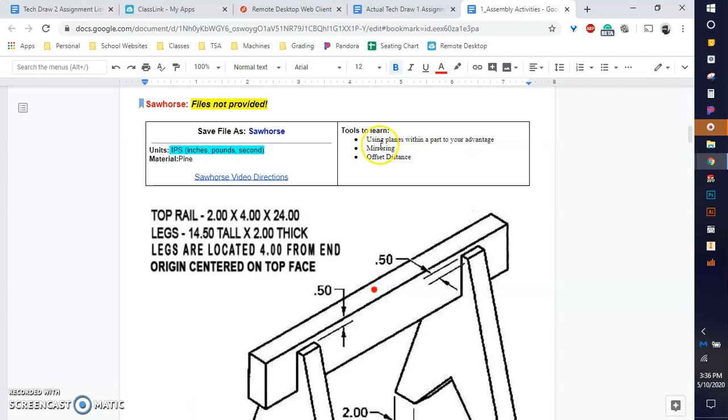This demonstration is one of the introduction or review demonstrations for TechDraw 2. If it doesn't refresh enough for you, feel free to go back to the TechDraw 1 website. In TechDraw 1, I have several different assemblies, and some might change depending on when you're looking, but I'm sure there are a few with videos like this sawhorse, where you can review things like using mirrors, offset distance, planes, and how to mate different parts.

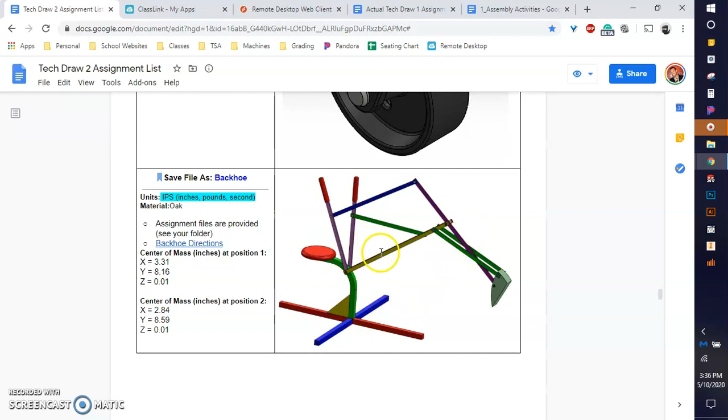So what we're going to be doing is just this caster wheel, hoping you remember a lot of it. Some of you might need to brush up on some things, but when you move on to the next assignment, in this case the backhoe, hopefully you'll remember a lot of it. Anyways, let's get started with the caster wheel.

If you're wondering why my screen looks slightly different, it's because I'm using the remote desktop web client for SOLIDWORKS, since I did not sign out a license.

The files are provided for you and are already in your folder. So you need to open up SOLIDWORKS, and you're going to start out by creating a new assembly file.

Once you open a new assembly file, it's instantly going to ask you what you want to place in there, or insert. So you have this insert component window already open. Now, it's probably going to open to the last folder you had up — in my case, since I already did this as practice, I have the wheel demo already open.

What you're going to need to do is find your Google Drive on your left side. If you don't have your Google Drive, if you're on a computer where you're not going through the web client, you might need to download these files from your Google Drive.

In order to do that, you would simply go to drive.google.com, and find your TechDraw 2 folder, wherever these files are, and just download them. For you, they will be in your TechDraw 2 folder, in a folder called Assembly Files, and you should have all the files you need.

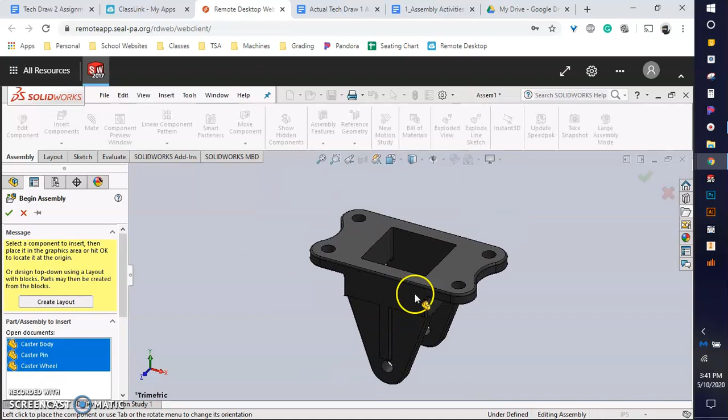If you remember back when we first learned this, it's going to go to an isometric view and ask you to click and place it. So I'm just going to click and place. It should zoom out a little bit, and it'll ask you to place the other ones. So we just have three simple files.

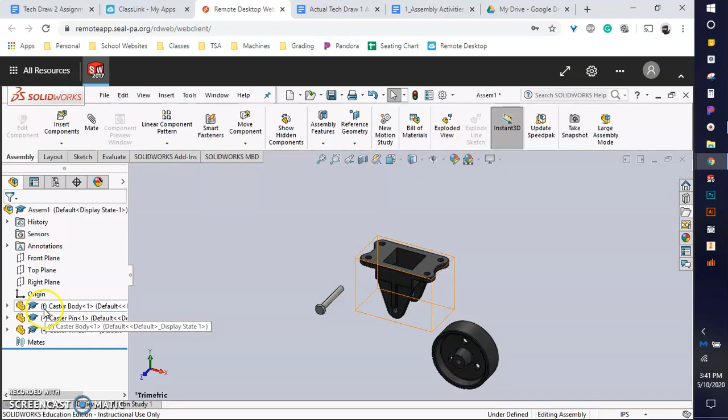As a review, whatever file you put in first — normally alphabetical, or if you do one at a time, whichever goes in first — that is going to have a little F next to it. That F means it is fixed in place. If I right click, you can see there are tons of strange options here, but there's one that says float. Float means it can rotate or move around.

So going all the way back to TechDraw 1, you learned that in an assembly, all parts have 6 degrees of freedom.

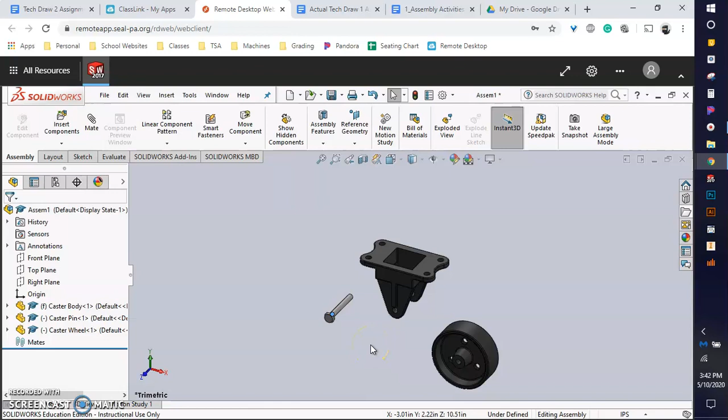3 translational, so left and right, up and down, forward and backwards, and 3 rotational along the X, Y, and Z. So if they are not constrained, they will be under constrained, like this minus sign, then it has 6 degrees of freedom. You are trying to limit the degrees of freedom so that it is either fully defined or that it just rotates in the way that you still want it to.

So in this case, this wheel is going to need to be able to rotate. Okay, so this thing is locked in place. That's perfectly fine.

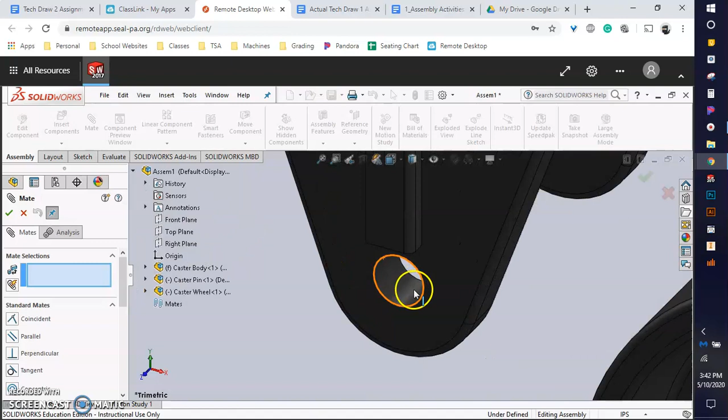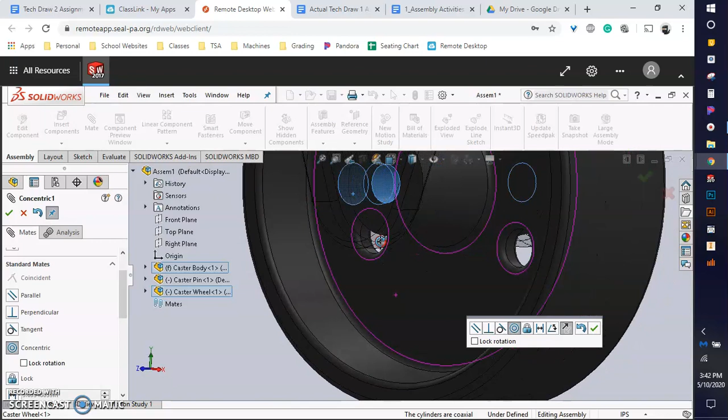Okay, so I'm going to zoom in a little bit. First off, I'm going to go up and get my mate tool. And here I am going to zoom in and select the inside of this hole, that cylinder, and the inside cylinder here, because what it will do is actually make them concentric. So it will line up the center of these two holes. Okay, it will line up the center of them, concentric. And I'll simply hit the green check.

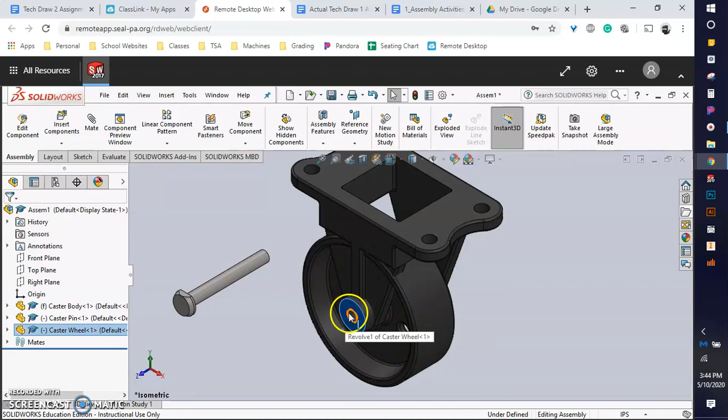Now, if I hit Control 7 to go back to a nice isometric view, you can kind of move this around and play with it and see what way it's now constrained. We just added one constraint, so certain movements will be taken away. In this case, since we did a cylindrical or concentric mate, this thing can actually move back and forth, but it no longer can go left or right. It can't go up or down, and it can't actually rotate because the center of these always have to be lined up. So it can rotate this way, but it can't rotate along the Y.

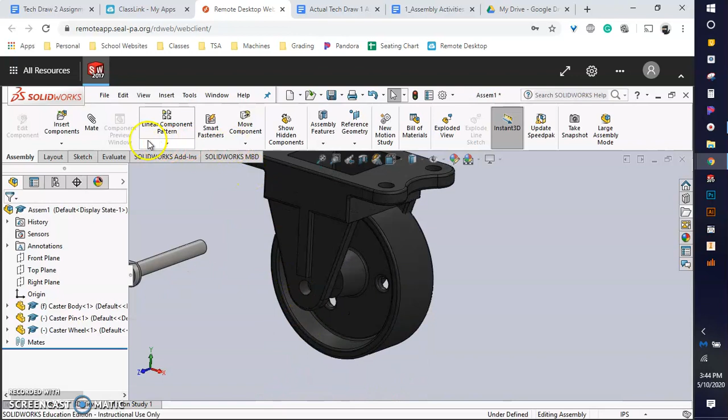Okay, so next is a little bit more complicated. What a lot of people would think to do is just do the inside flat part here and the inside flat part here. And I'm going to show you why we can't actually do that on this, why that's wrong. So you shouldn't do this, but you should just watch this part.

So if I got the mate tool and clicked that flat surface and rotated around and clicked this flat surface, look what actually happens. So I'll hit the green check and then show you how to get out of this. So you see it's flat or flush here, but over here we have a gap, okay? But we don't want that gap. We actually want this wheel perfectly centered in between.

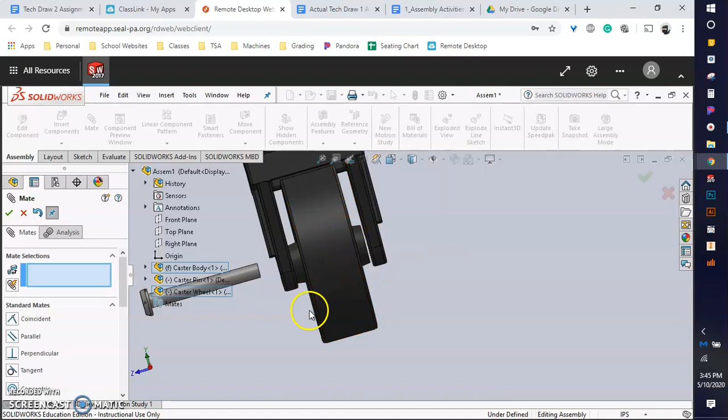So first off, that's what we shouldn't do. Secondly, if you do a mate that you accidentally want to get back, I highly recommend not hitting the back button because sometimes that undoes a lot of things. So what I will show you is every single part over here that's listed, if you hit the drop down.

Like we just added that to the wheel, it has a folder that says Mates in Assem1. So you can actually individually see whatever mates were applied to that part. So in this case, the caster wheel. So that was the good one. This is the one that we don't want. Okay, so that is one simple way of deleting it.

Another way that you can delete it is if you scroll all the way down, there's a folder that says mates. And that shows all the mates that have been attached or applied in an assembly. So you can delete it either place.

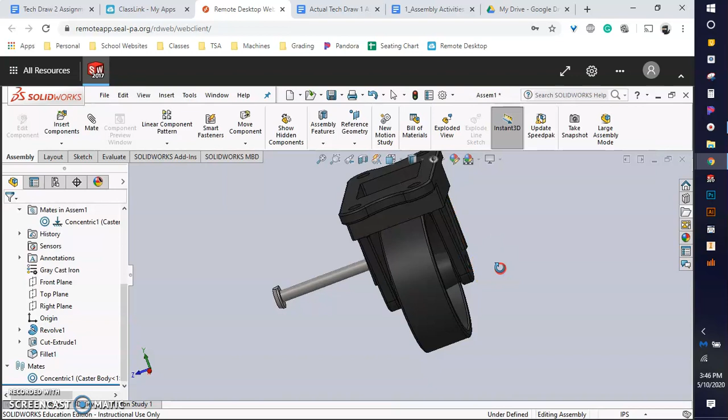Okay. And the more complicated way of getting this perfectly centered is actually using planes. Now, we could still create our own planes if we really wanted to, but what I like to do first is actually see if these parts have their own planes that go through the middle of them. So this caster wheel itself, if I just hit that drop down, I can move my mouse over this and see where the planes are.

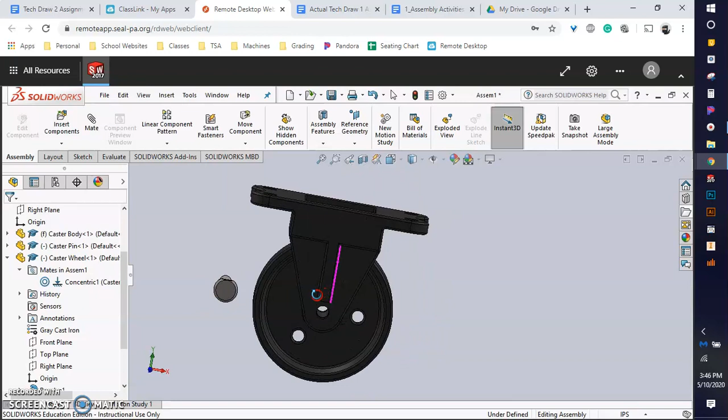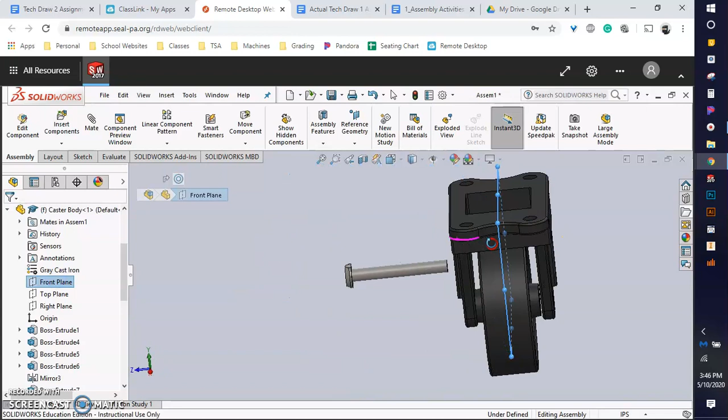Okay, so we want a plane that's cutting through the middle from left to right. So it's actually the front plane right here. So you can see that's going right through the dead center of this. Okay, so let's see if the caster body has the same situation. So I just hit the drop down next to it. And the front plane there also has a plane going right through the middle. Well, that's perfect. So I don't have to make my own planes.

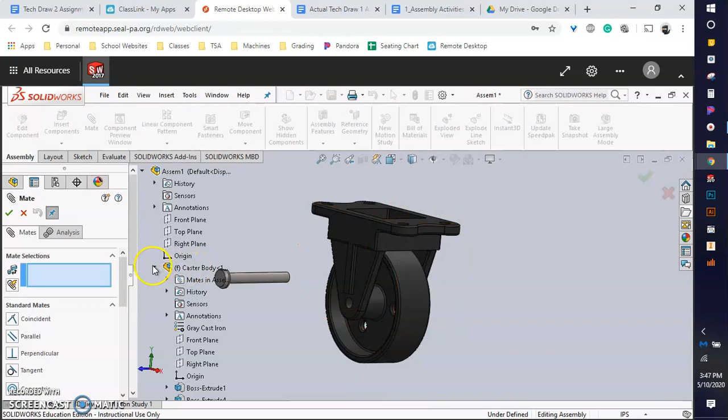So what I'll do is hit the mate button. Notice I already had my caster body front plane selected, but say you didn't. I'll hit the drop down and find my caster body, hit the drop down, and select the front plane. Then I'll scroll down in this list, find my caster wheel, hit that drop down, and find the front plane there.

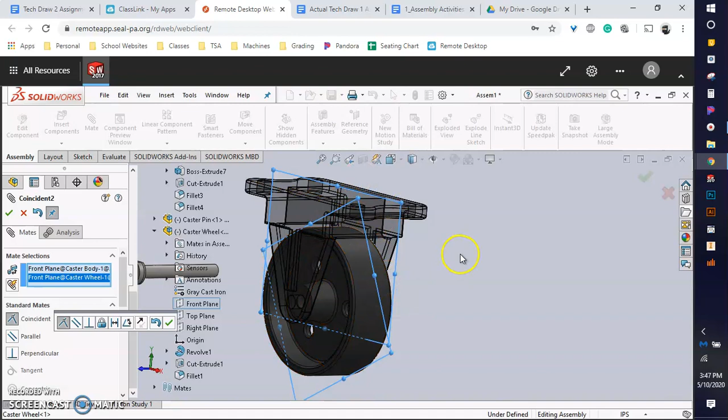So what I just did is mate two planes. I didn't even click on a single flat surface, I used the imaginary planes cutting through the middle. Now when I hit the green check, you can see this thing is perfectly spaced in between. There's the perfect gap. So that's what we want.

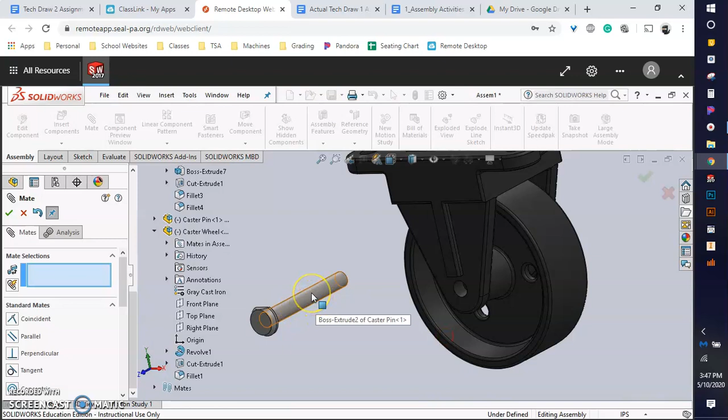Next, let's look at this little pin that goes through it. Some of you are probably saying, I already know what to do here. Let's do the cylindrical portion and the inside, just like we originally did. That lined those two up and made it concentric with the green check. And if you notice with this head, a part of it is filed or cut off, and there's this little part that comes down here. That part, when it's all the way in, keeps it from rotating.

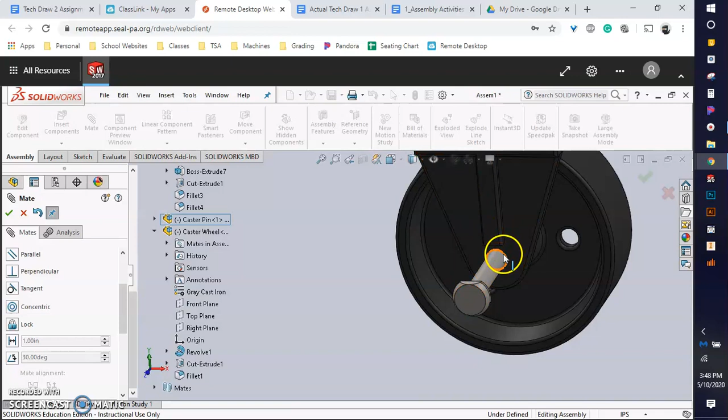So let's click on this flat surface of the caster body, rotate around, and select the inside of the head here, this flat surface. Now it makes those two perfectly even, and if for some reason yours flipped the wrong way...

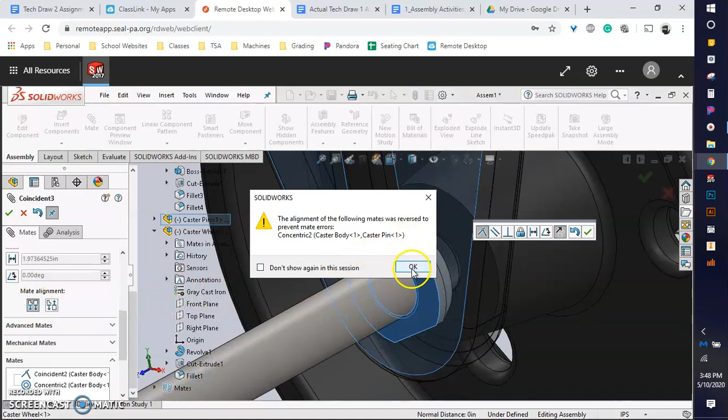Do you remember we have this mate alignment? Mate alignment flips the way it's aligned. We actually want it this way, this is the correct way. I was just showing you in case yours messed up, or in future assemblies if it messes up.

So now we'll hit the green check. This can actually still rotate, as you can see. It can move only in this direction, it can't move in or out, can't move up or down.

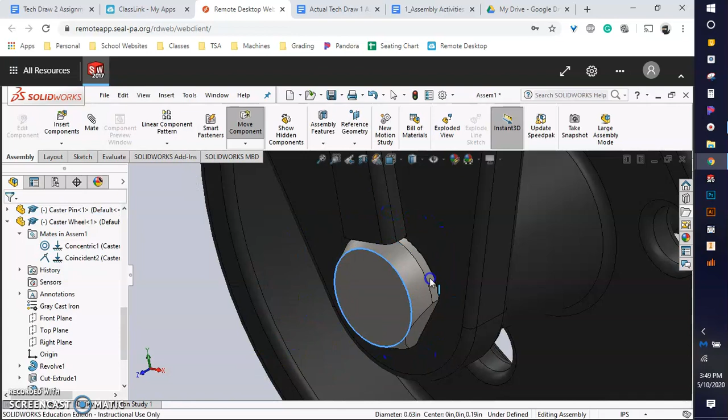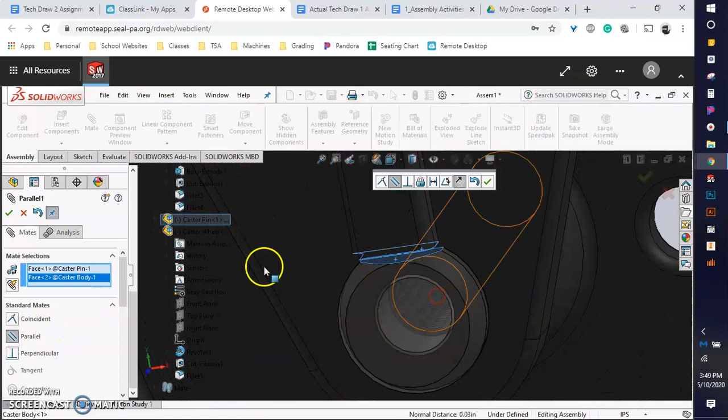It can only rotate. So what we need to do now is select this flat part here, rotate around underneath, and select that flat part there of the caster body. It's going to set them to parallel. They're not actually touching, but they're parallel to one another, meaning we just told this little pin it can no longer spin.

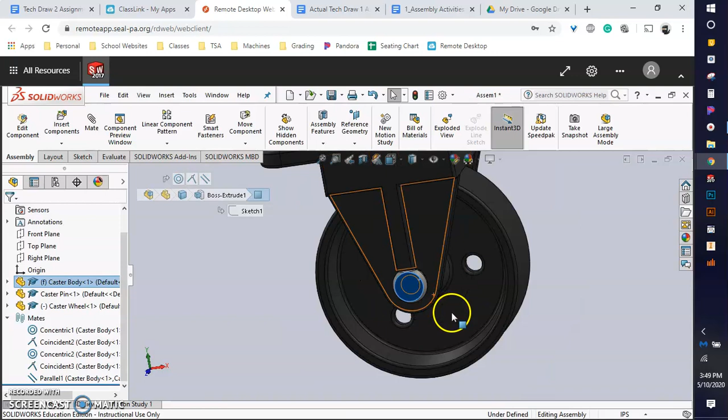So if we look over here, the caster body is fixed. Caster pin, since we added 3 mates to it, is actually fully defined, and the caster wheel is underdefined. Now, we don't want to make this fully defined because we still want that wheel to spin.

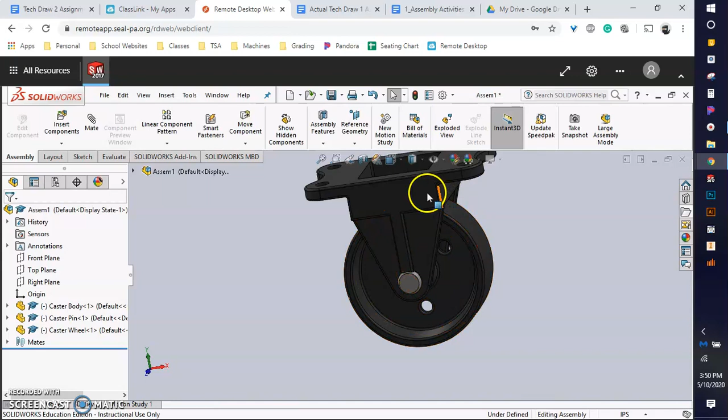Just like so. Now, just to see if you did everything correct, you can right-click on the caster body and hit float. Now everything says it's underdefined, even the pin. Even though you added 3 mates, that pin is only defined to the caster body and the wheel, it's not defined in space, meaning when you move this, everything now moves together. So it is all one functional caster wheel.

All right, so that is the demo.